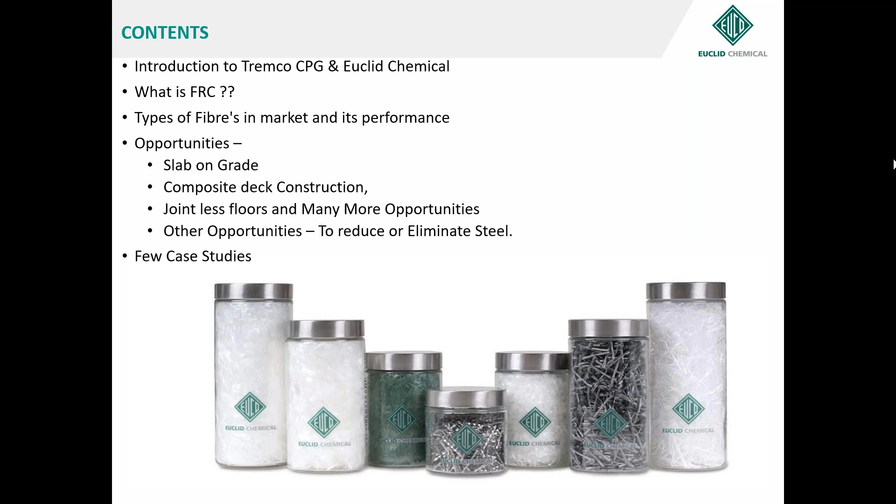So as an introduction, with the permission of ICI and QCrete, I've taken this so that at least people know where we are speaking from, and it's not that none of us know this company.

So we all belong to a company called RPM, Republic Powdered Metals. It's a 6.71 billion dollar organization based in Cleveland in the US, that's around 53.6 thousand crores globally, and it's listed on the New York Stock Exchange. We've acquired around 175 to 180 companies in the last 35 years when it comes to technology.

Under RPM, we have four groups. The group we belong to is Construction Product Groups. If you look at the technologies we have, one of the leading brands globally is under our umbrella, whether it is admixtures, waterproofing, fiber, fire protection, or color concrete, you name it, we're probably one of the companies which has everything under one umbrella.

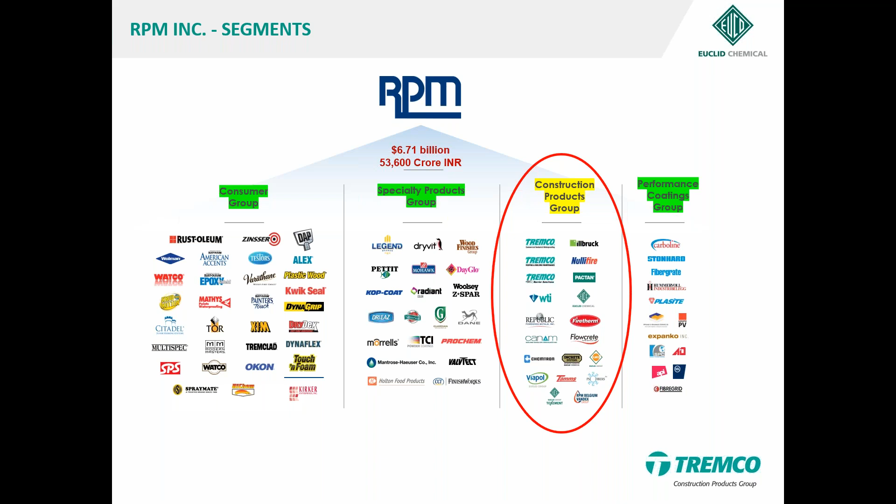In the near future, I think you will see the technology getting released in India also. So in India, the advantages we can all take are under the brand of Tremco, Vandex for the entire waterproofing range, then glazing, especially sealants, tapes, and EPDM rubbers. For flooring, all of you know the brand is Flowcrete, and you name the flooring solution you want, from fibers, densification, polish, epoxy, to terrazzo.

Will be available. Euclid is a 110-year-old brand globally, and for anything to do with fibers, admixtures, repair mortars, we would be able to serve through this particular brand. Willseal is another organization which will be getting into India, maybe in next around a year or two, which is into preform joints of flooring and multi-level car parking and buildings.

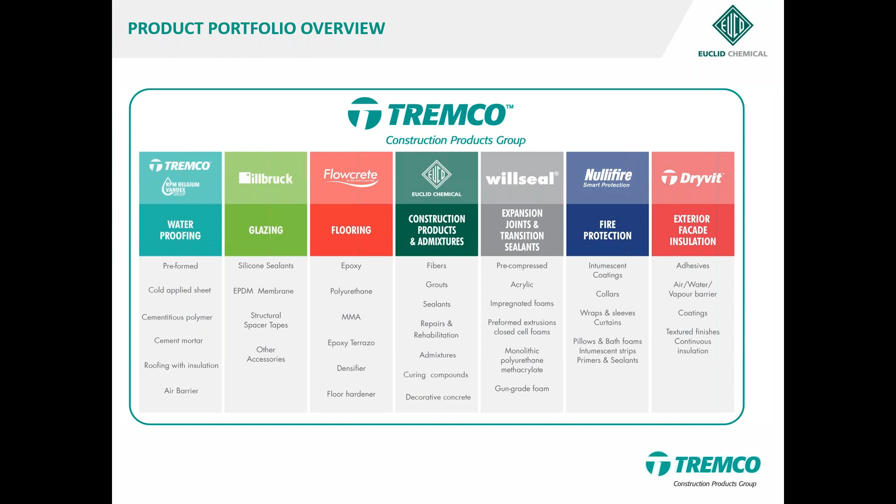Another one which probably none of the construction chemical companies have here is the Nullifire, the fire protection system for composite steel deck, which is basically into cellulose fires. And Dryvit is something coming up in the next few years, which India is going to catch up on - external insulation and facade systems. This is a small brief introduction of the organization.

So coming to the main topic, what we are talking about is only fibers. This is not something new to us. Probably we are using this as a fiber in today's world, but all of us know when you look at 500, 400, 300 years back, when people used to go to their village, they used to see straws getting mixed in, whether it is in mud or even mixed with cow dung, that was mainly used to give post-crack strength to that particular part. So this is not something new today, but it was also used in a very primitive age, and that has gone to the next level of technologies with design and other things for execution.

So majorly what we would be speaking today is on structural macro fibers, which will give you additional tensile and flexural strength other than the crack reduction part to the concrete. By doing this, basically what happens to the concrete is the integrity and durability gets increased because there is less cracking happening. As all of you know, with one small crack in the concrete, the entire deterioration or corrosion or whatever happens in the concrete starts with that.

So the basic thing is to see, as civil engineers, all of us, can we give - I know it's really impossible to give - concrete without a small crack, but at least we can reduce it to 95 to 98%. Probably that itself is going to be a big achievement to us as a civil engineering fraternity.

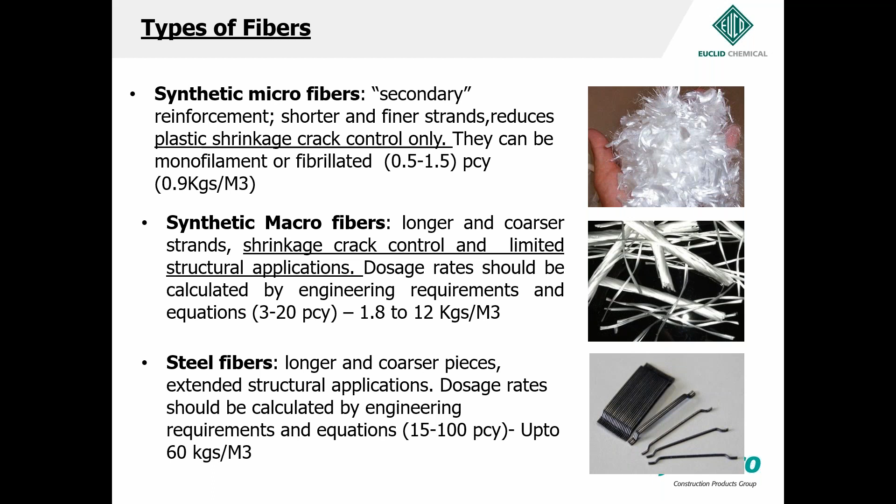Steel fibers, I think quite a lot of people know about it. It's also a great product to have. But yes, all three fibers come with their own advantages and disadvantages. Looking at the risk analysis, we should choose the right one for the right application, and the execution should be flawless. Only then you get the right product.

As I said, just because we are from a US organization, I just want to tell you very clearly - in the US market, the use of fibers is far ahead as compared to any part of the world. They use fibers literally because of the freezing and thawing that happens in US due to extreme temperatures. So from that particular thing, the fiber market in the US is very big. So when it comes to there, you can see the types of fibers we have. Even in microfibers, we have nylon-based, monofilament, fibrillated. Then there is a blend of macrofibers with microfibers - they do the designing of concrete with a lot of blends of fibers also for achieving different properties in concrete.

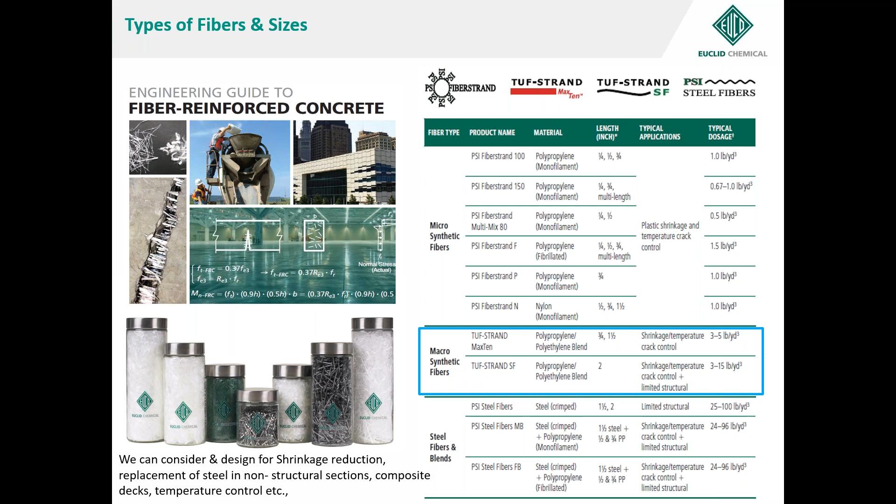So this is again an engineering part. It's not that you take a packet of fiber, add it, and get the output. You have to test it, design it, and then execute it at the site level. To introduce, fibers can be 10mm, 20mm, 38mm, 45mm, or 51mm - these are the different sizes available in today's market.

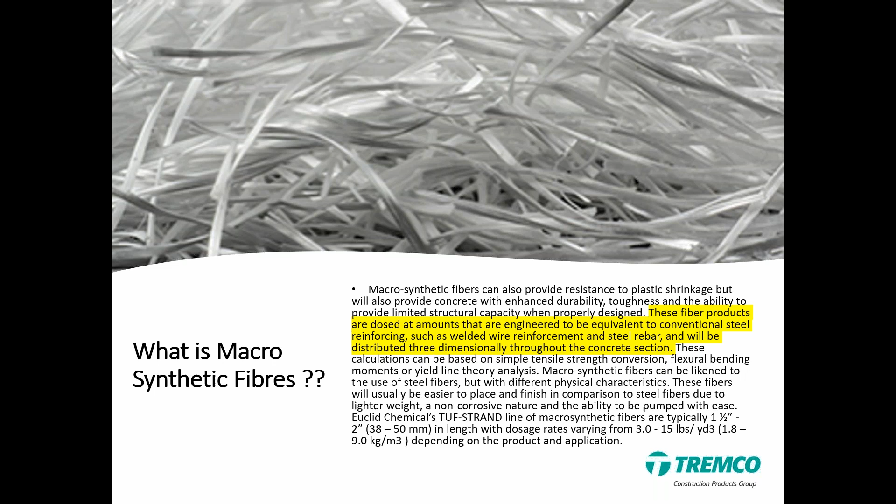So what is macrofiber? This is one of the topics we'll be focusing heavily on. It not only reduces plastic shrinkage cracks, but the most important thing is, for conventional steel, if you design it properly, we'll be able to reduce the rebar and wire reinforcement coming up in non-structural elements - that's the use of macrofiber. Please understand, there is a difference between microfiber and macrofiber. In microfibers, we cannot speak about replacement of steel bar or wire mesh at all in any civil engineering aspect.

In this case we have an RCC slab, and again we have 75mm of concrete. So for 75mm of screed concrete, when you do structural screed concrete, we again add reinforcement. A lot of places you can eliminate the steel usage entirely - you can avoid cracking and eliminate steel.

So these are the advantages. I spoke to one of the top consultants in Bangalore, and they told me the non-structural element concrete in a condominium project or any project is almost to the tune of around 27 to 28% of the project. So even if you reduce 27 to 28% of the project without using steel, that's a big saving to the country, and probably you'll also make the concrete much more durable.

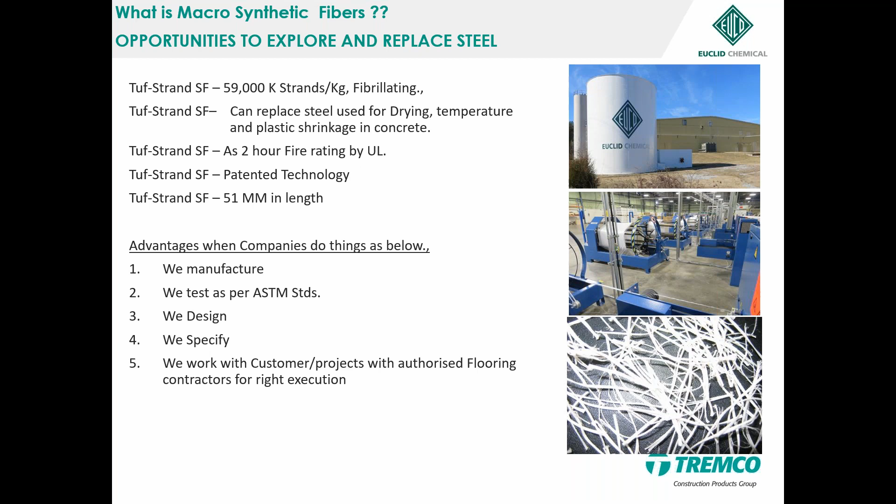Second thing is you need to have a fire rating in some of the elements. And it should be 51 mm in length; anywhere between 42 to 51, 52 can be called macrofibers. So this is what is very important to us.

Then what is it all about when it comes to properties? Whether it is dosage, it can vary between 1.8 to 12 kg by design. So again and again, I want to reiterate, nothing what we're talking is without design. We do not recommend any dosages unless you're adding for a simple plastic shrinkage crack. So load, we'll always take the information from you and provide this. So when it is aspect ratio, tensile strength, modulus of elasticity, all of these things are available to you.

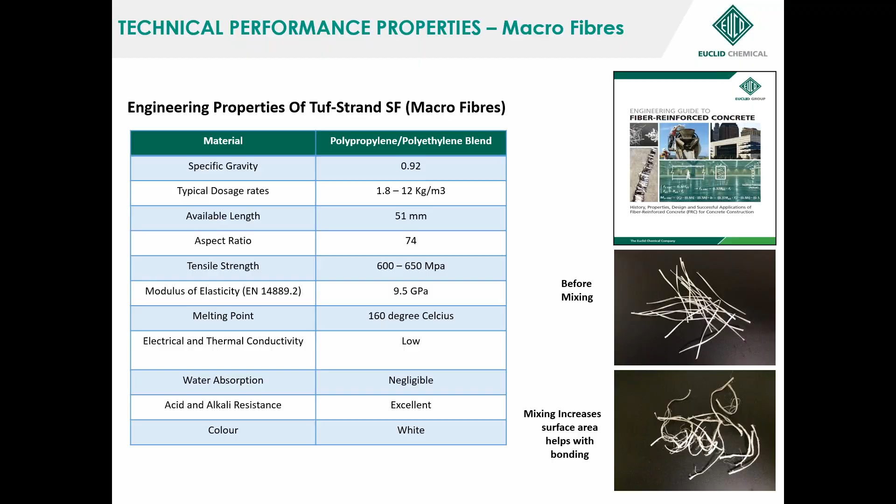So this should have this type of properties if you really have to pass the ASTM standards. So this is a lab. Without this equipment, you cannot get into fiber FRC at all.

So this is an Instron machine which does the testing on beams, whether it is C1550, all of this flexural strength, tensile, testing of filaments is very important. So it is very important to have this equipment. Otherwise, we are just adding fibers like any other fiber, like the microfibers at 900 grams per cubic meter.

So these are the testings you need to do: ASTM C1609, C1399, and especially rheology properties are done with 14651. So these are the tests you will have to go through for each and every design when we do any mega projects, whether it is for a slab on grade, whether it is for steel deck, all of this.

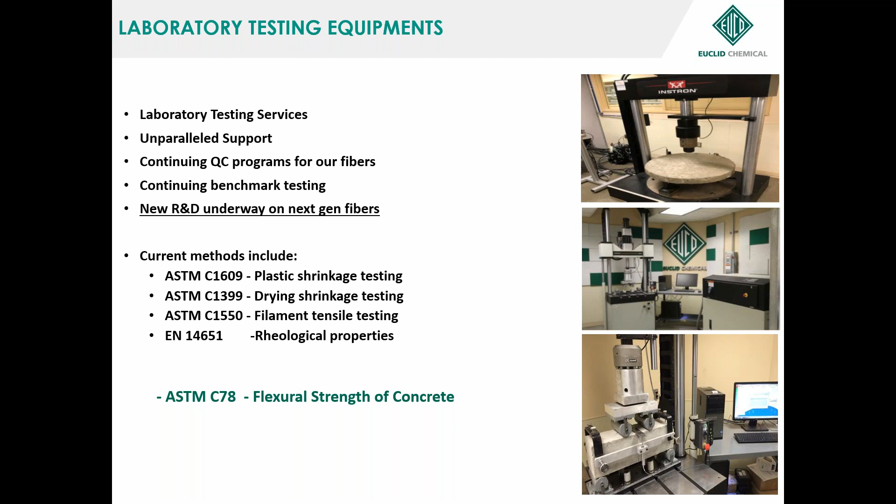So I'll just take you through slab on grade, where we can replace the steel entirely by doing the right design, depending upon the pile, K value, and all other parts of it. This is a major thing in India today. If you're able to do slab on grade and replace the entire steel for this, it's a big savings. And I'll show you some case studies where there was a massive savings to the customer worth few crores, not only by rupees, also by the time.

So what we are doing is, conventionally with proper designing, we are moving towards this jointless floor or extended joint spacing from a conventional 3x3 or 2x2, which is what our standards or whatever we are practicing today. We move those joints to the major thing. We almost go up to around 15 meters by 15 meters.

One of our very close associates working with us moved with fibers and Conex put together, which is a shrinkage compensating admixture put together, and can move towards around 12 to 13 meters per panel, which is a big achievement from 2 meters by 2 meters to 12 to 13 meters by 13 meters. It is a big leap they have taken, and I think that is getting monitored. It's already been a few years now. It is under a lot of monitoring in one of the projects in the north of India.

So what we talk about on this extended joint spacing, we need to have high flexural strength fiber reinforcement. There is no compromising on curing and other things. So a lot of people say that we add fibers, do we really have to cure? Some questions keep coming up like this. I'm adding shrinkage reducing agent, shrinkage compensating agent, should I want to do curing to the concrete? Some basics cannot be reduced. Please understand, these are really basics where some of the products also need water for better performance.

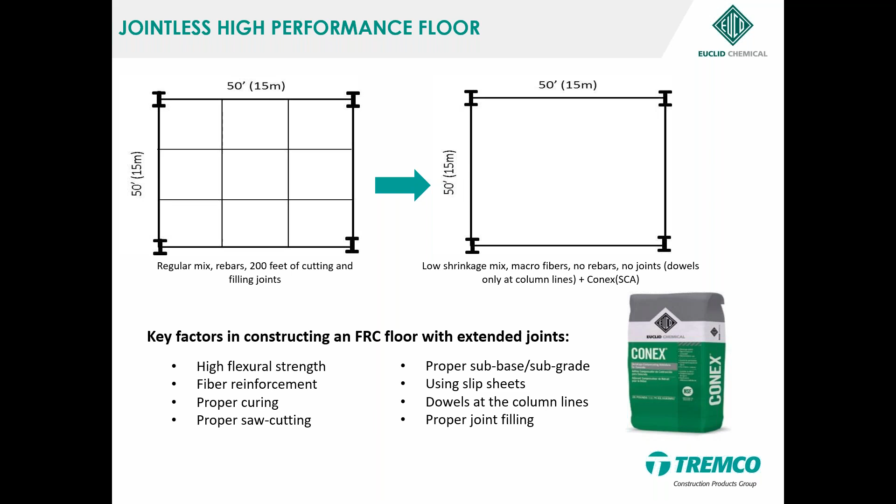So what are the advantages?

What you see when we are moving from reinforcement concrete to fiber reinforced concrete without steel? You're talking about reducing labor, cost, speed, safety. A lot of people's legs get torn apart. You're improving the process because imagine you're doing a 50,000 square meter job. Imagine tying of reinforcement, getting the reinforcement and placing it itself is a big process. So you're eliminating that in one shot. Once your consolidation of soil is over and you're done with your LDPE sheet, you simply start with high flow concrete or self-compacting concrete, whatever is the best possible thing. We'll be able to do it with macrofibers instead of reinforcement, and you finish the concrete. So there's a lot of savings.

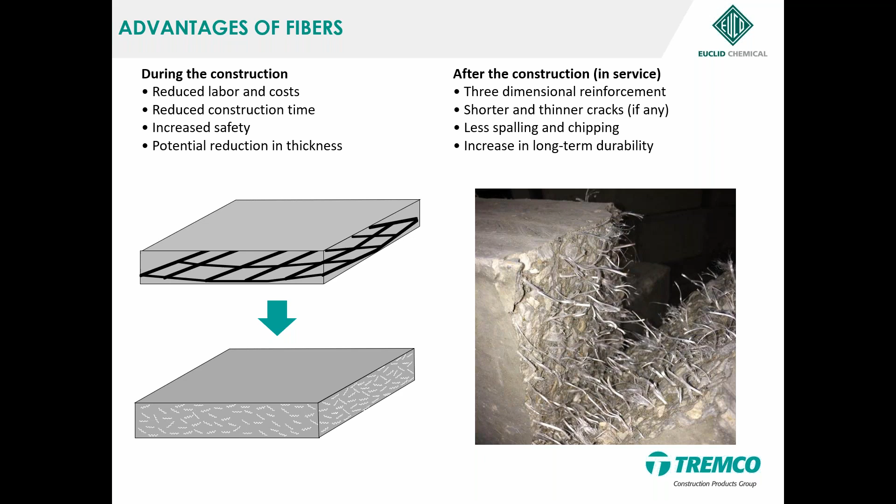See, on the left side, you see the way it has traditionally been used, people trying to lift the reinforcement for the concrete to move. Basically what happens, we generally have cover, but the cover is for the sake of telling that there is a cover. By the time you put the cover and the concrete comes inside, a lot of people stamp on it, a lot of trucks move on it. So the reinforcement is there for the sake of reinforcement. It is at the bottom, it is really not there at 50 to 60% above the concrete. Because of that, you can see the middle thing, which is the cut concrete, is there. The reinforcement is at the bottom and the concrete there.

Because of this reinforcement and no fibers available in the concrete, the tendency of the concrete to crack is very, very high. So this is the reason we say that we need to have fibers into the concrete, to reduce or to increase the ability of the concrete to resist cracking. So this is something we should look forward to in a futuristic way.

Understanding of failure mechanism, a lot of people know about it. People like Mr. Mohan Ramanathan are also there in the show. They are the masters in these particular executions. I've seen their design, so they really understand what is curling, load transfer, joint spacing. All of this we should understand, how to mitigate this by having the right mix designs, right subgrade preparation, designing done earlier. At least 3 months before the project starts, we should have everything in place. So everything boils down to proper planning. You cannot start an excavation and then tell that, oh, please come with fiber reinforced concrete. That's not the way to do it.

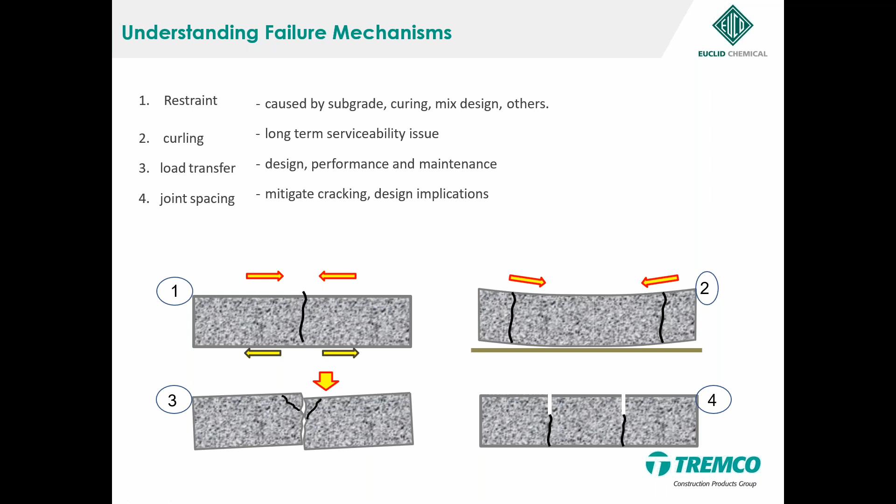So load transfers are very important. You can look at the third photo - it can have differential settlement, or the soil can be loosely compacted. So it has various things. All these things can be taken care of if you're really looking at fiber reinforced concrete.

As I said, you can see the fibers spread across the concrete, whether it is bottom or top or anywhere. So whether it is crack control or shrinkage control, because it's got a 3D reinforcement, it is controlling that. So you have this reduced on this particular part. Even at the edges, if you see a crack coming up on the construction joint or expansion joint, with fiber reinforced concrete, at least it holds it back for a longer time because of the post-crack resistance that fiber concrete brings into the structure.

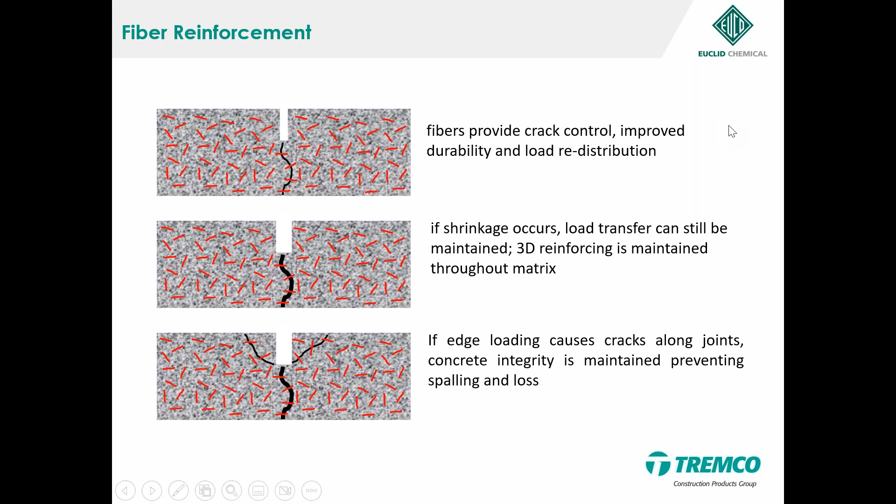As I said, none of these things are done by just adding a packet of fibers. These are all done with a lot of calculations. And as I said, from our side, Mr. Srinivasan is available. If anybody wants some support, please connect with Mr. Kaushik for this, and probably we'll see how we can work with QCrete and come back to you on that.

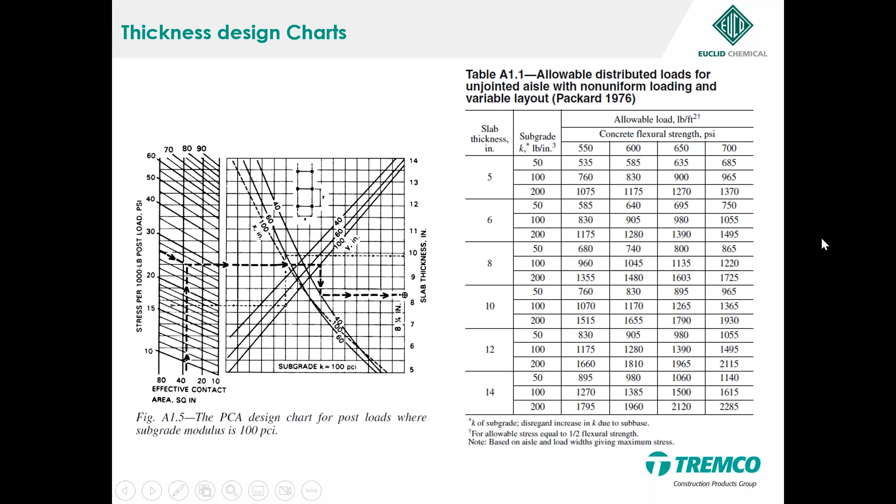So whether it is the design aspects, whether it is which slab thickness you want to choose with a subgrade, with a K value, and flexural strength requirement - all of this is taken into consideration while designing the fibers, dosage per cubic meter, and then the report will be given to whoever is interested, whether it's a developer of the warehouse, wherever the industry, or to the RMC ready mix concrete people, or whoever it is. As I said, it all goes with the calculation.

So we are talking about how do we convert steel reinforcement calculation into the fiber reinforcement calculation. So whether it is a single mat calculation, it can be done. Whether it is a double mat calculation, it can be converted to a fiber reinforcement calculation. So this is what we apply, going from conventional steel reinforced designs to the fiber reinforcement design.

If you can give the information about this today, we can definitely convert it into fiber, and it'll match all the properties of steel, or sometimes it is better than that. Most of the time it is better than that. So that's the reason we are talking about high performance fiber reinforced concrete.

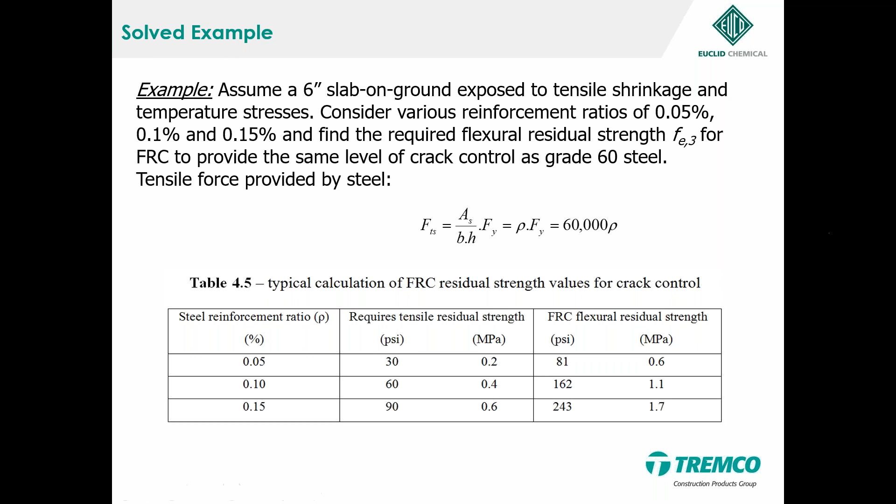To the calculations, it is definitely much better when it comes to the calculations. So we should look at designing in this particular aspect. As I said, this is a theoretical, a designed output, what you people will get.

I've just given a typical example, this one, my colleague Srinivas helped me in this, putting these things together - how we can do design 1, design 2, design 3 in a different way for the same mix design and the same subgrade modulus of elasticity, this modulus, and then different slab thicknesses, how the load value of different loads and the dosage of fiber differs, shown by this table.

Because of so many designs we have done over the past 4-5 years, we thought we'd put it together for everybody to understand that for different slab thicknesses, we can reduce the thickness when the reinforcement of the fiber goes up. But if you want that to happen, we can definitely do it. It is possible. We should look at the cost engineering aspect also.

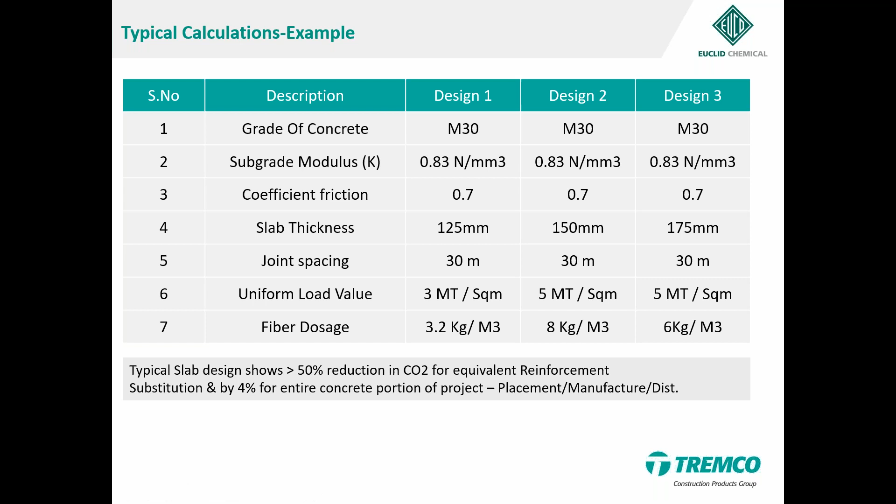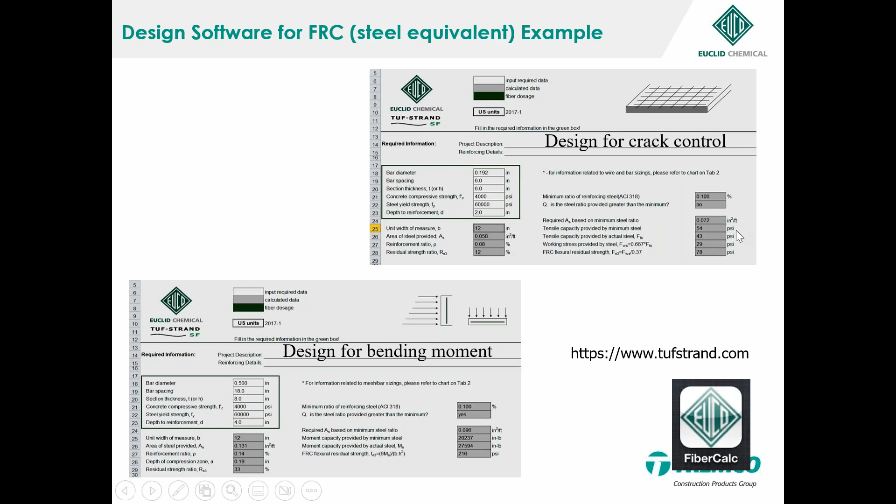As I said, all bending, whether it's crack control, bending moment, flexural, all these designs will be provided to you people, you can take it up. So that is a short summary, and I will just take you through a small project we did, just to show that whatever I've spoken is also executed in a particular job.

This is one of the jobs very close to Coimbatore. People know it as Erode. This particular company makes the blade for a turbine, and they also make high-speed shaft generators. So this is what they do in this particular factory.

So we were involved in the process. We did the load testing. Sub-base CBR values were taken. Dead loads and live loads were calculated. LDPE sheets were put in place. So all the designing was done accordingly.

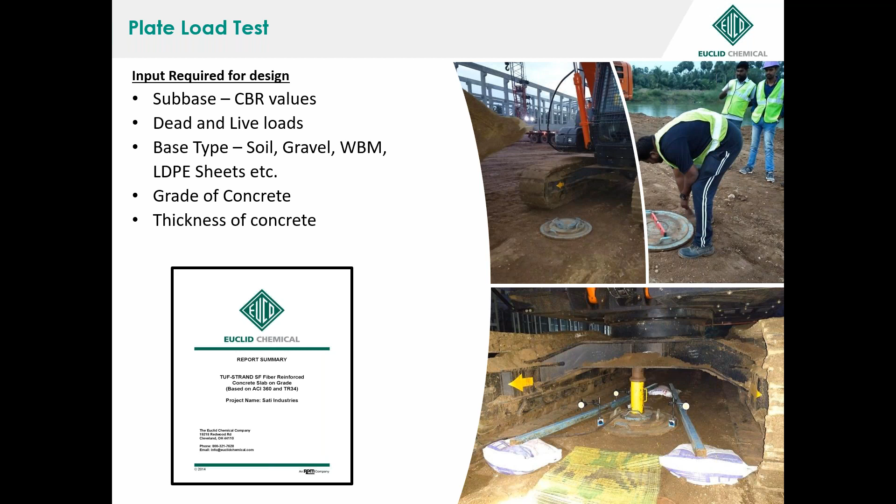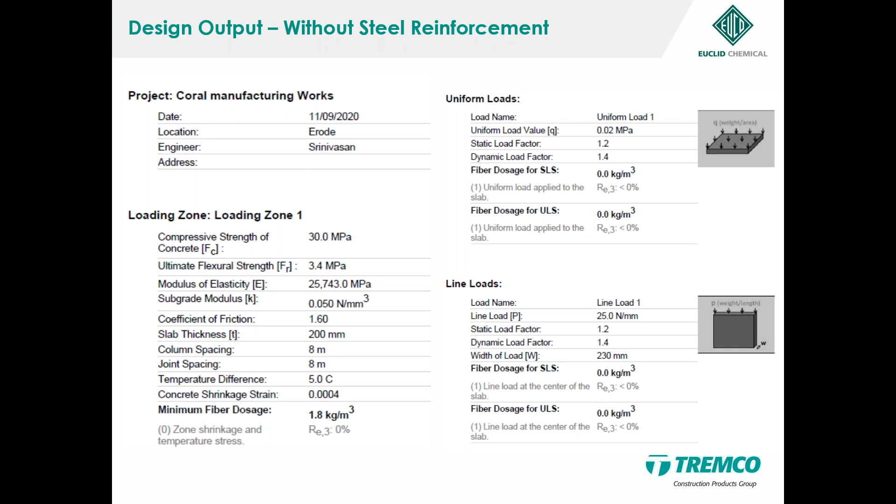So this was the output of it. Whether it is rack post, this was taken. The rack loading was taken into the calculation. Line loading was taken into the picture. So all these things were provided to the client. What I mean is, I'm just showing you the process we go through while designing without steel.

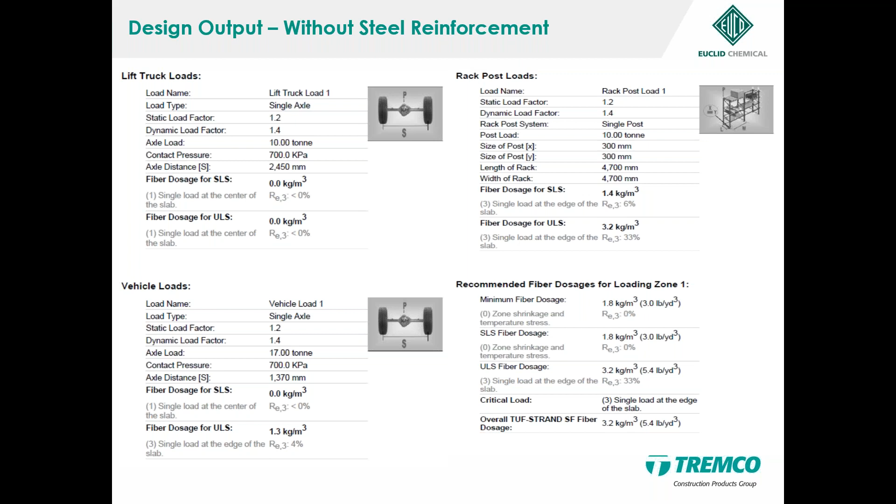So this is an execution. You can look at this. I think a lot of people have mastered it, I'm sure, but there's still a long way to go to take it to the next level.

But you can look at it - with conventional steel reinforcement, probably with tying and everything put together you may do 200 square meters, but on this particular job the person was able to do almost around 1,000 square meters per day. Because they were able to achieve the timeline, the client was really happy because of the speed. I think the entire job was done in around 35 to 45 days.

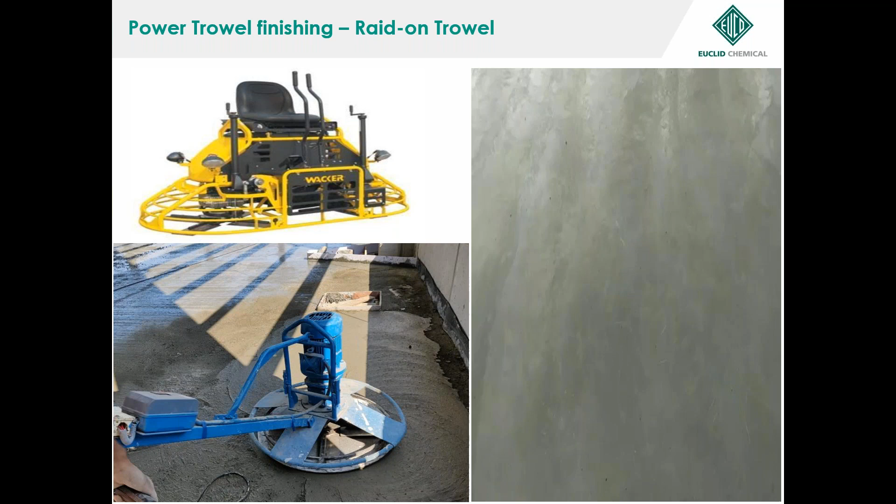The entire job of around 35,000 square meters - you can look at the finish. You don't even see that there is a difference in the finish when you do it rightly. So this was the finish we achieved. You can really be confident about the finishes if you use the right equipment at the right time. So this was the job, how it looks like.

And not only did we do the internal part of it, we also designed the road around that particular factory, but the dosages are different. That just gives you a glimpse that we don't only do the internal area of the slab, slab on ground calculations and execution - we can also take the axle load of the trucks and other things which comes to the maximum, put it into the calculations and a software calculation, and then execute it.

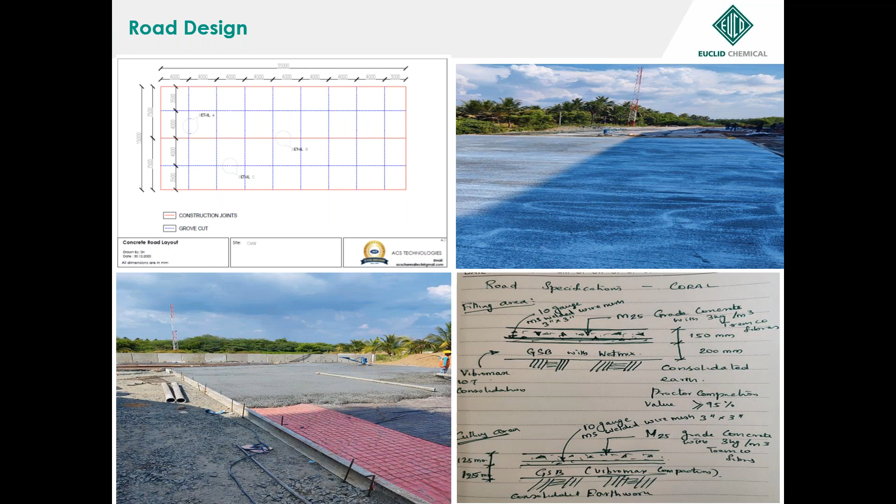Another job, one of many, I'm sharing some examples. This job we did was in IKEA, Bangalore. This was a slab, a screed of 75 mm, varying anywhere from 35 mm to around 75 mm to 95 mm.

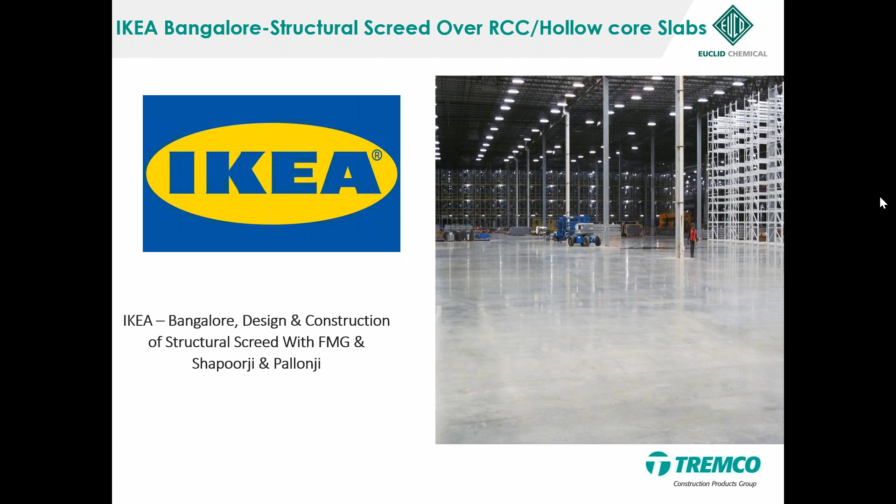This was done on a hollow core slab and RCC suspended slabs. This is where these applications are massive in our country. If you're able to reduce steel even in this area as a country, everybody will benefit. So again we approached with design and build, and it was done with Shapoorji Pallonji, and FMG was the other company who worked along with us to execute this particular job.

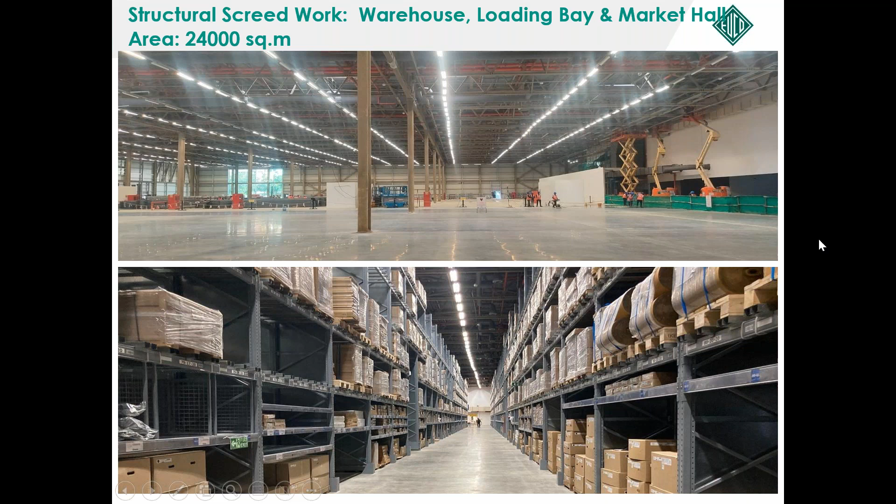So this is how the project looks like now. It is fully operational, it's become a gala event now. People go there not only for shopping, they spend a lot of time in the outskirts of Bangalore. You can look at the finish - after doing this densification and polish, you can see the way the concrete looks like now.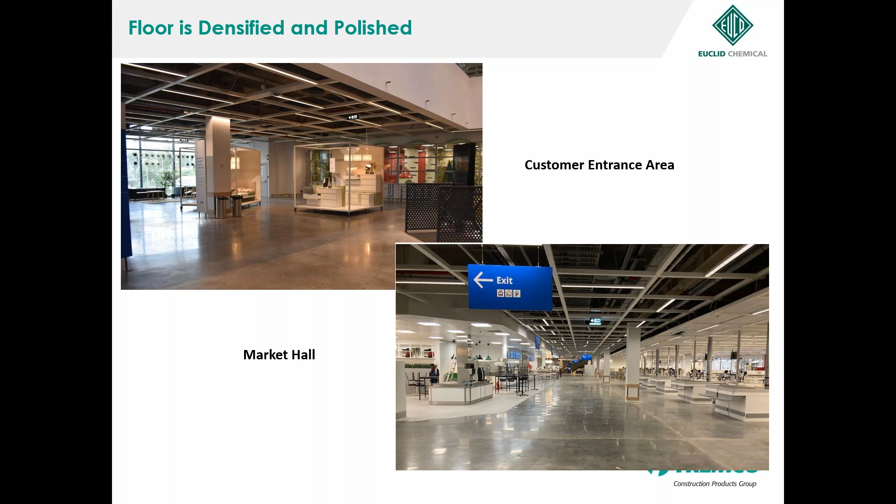A lot of people have doubts about adding fibers. The most important thing is to add the fibers to the dry aggregates as much as possible. We should not compromise on this, because the fibers - a lot of fibers are fibrillated or fibrillating, two different words. It is better that once it goes into the friction between the 10 mm, 20 mm aggregate and sand, the fibrillation happens, it opens up, and has a better anchoring into the concrete.

So it is better that we add these fibers in the dry state. Otherwise, if you add it when the truck comes to the project site, and suddenly add 12 kgs or 15 kgs per dosage, even with microfibers - say 1 kg into 6 cubic meters - if you do not do the rotation for 10 minutes, and do not take the slump to 175-200 before adding fibers, the slump drops to around 110. But if your slump is already 110 at site and you add fibers, it will come down to 25.

Then what people do is add water, and you still have a problem with cracks. So this is something to look at - best practices which should always be followed. We always say to use it in a dry state. If you cannot, please see that the slump is at 175 to 200, then add your fibers and see that it comes to around 125 to 150, depending on the type of concrete you're pouring. Otherwise it'll fall to 25-30 mm, causing balling of concrete, and people will blame the fibers for a big issue, when really execution is more important after designing is done.

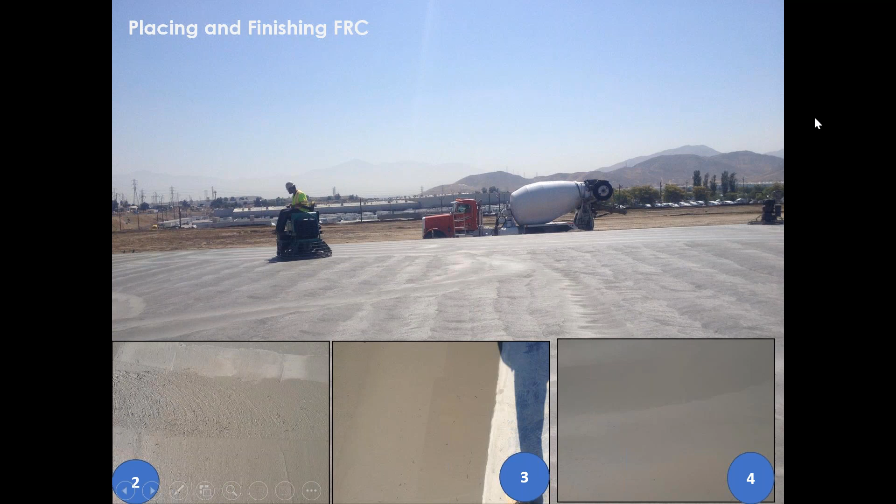Please understand that this is a special concrete. It is not conventional concrete at all. So it has to be planned. It has to be added the way we spoke about, with the right slump, no addition of water, and the execution of troweling guys coming at the right time and doing it is very, very key for success of any particular fiber reinforced concrete. So you can get as good as this concrete.

So why should you compromise if you do a little bit of good planning? From that slab on grade, I'll just take you through another opportunity where you can replace steel, on the composite deck construction. This is catching up in India in a very big way. And we need to understand why people are talking about steel composites.

Basically it's very, very fast. It is expensive, by what I know when we speak to companies like L&T or other big developers. Structural consultants say the cost is anywhere between around 25 to 30% higher as compared to RCC structures. But still people go for it because of completion of time. So you earn money, or rent, for the big IT parks coming in, much faster as compared to the RCC part.

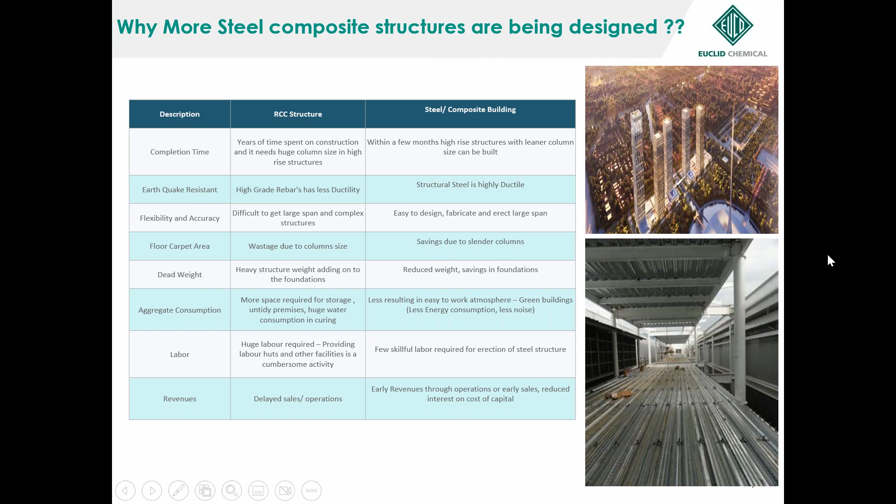It is better earthquake resistant, more flexible, and gives more carpet area because everything is slender and thin. Dead weights are very, very less. So the use of skilled manpower is also reduced, because otherwise it takes huge skilled manpower coming into the place. Where in India, with freebies given by each government, you will not be able to get the right skilled labor doing the right execution of the job.

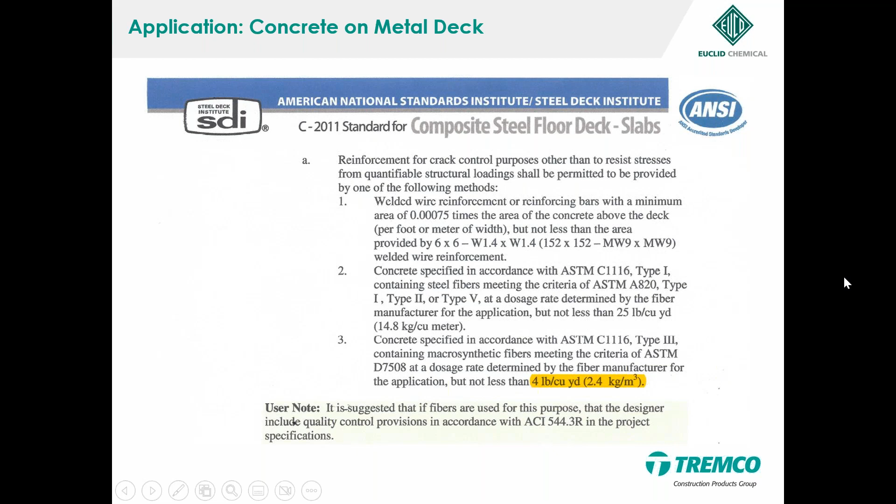So again, we are not talking about anything outside the code, whether slab on grade or deck. We are talking clearly about the ASTM method, SDI, that is Steel Deck Institute, where it is clearly mentioned you can use steel mesh, steel fibers, or macro fibers at a particular dosage already defined. It's close to 1:5, that every kg of polypropylene macro fibers added, you need to add almost 4.5 to 5 times of steel fibers. So you need to add so much material into the concrete.

So what we are talking about is basically the reinforcement on the deck is replaced with macro synthetic fibers. Even in the negative bending moment, we can increase the dosage of macro fibers, or look at a 4 feet reinforcement going across the beam, which can take care of the negative bending moment. Either way you can think about it, and there are job references, jobs executed with and without this. I think you can contact Mr. Kaushika. He would get back to you to take care of these particular design aspects also.

So what are we talking about? The main purpose of adding reinforcement on top of the deck is basically for 3 reasons: plastic shrinkage control, temperature control, and drying shrinkage. In some places people design a little on the cantilever side. When the deck goes outside by a few mm, or half a meter, or 1 meter, there is a cantilever movement coming in. There you will not be able to use fibers only. You will have to go with a blend of your regular reinforcement and this together.

But the most important thing you are looking at is that this particular fiber has to be qualified, UL tested with 2 hour fire rating, because any composite deck building has to have 2 hour rating for the entire building. So obviously fiber is one part of it which you have to take care of. So you look at the advantages here when I'm talking about not just speed to the construction.

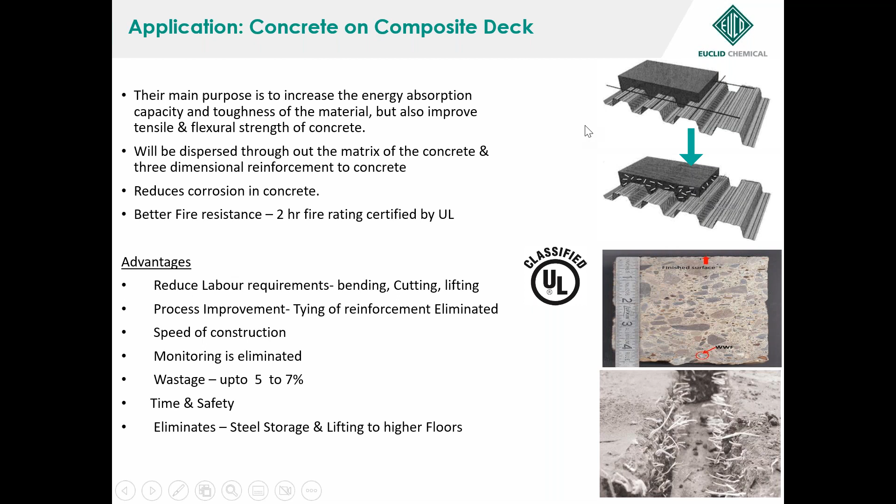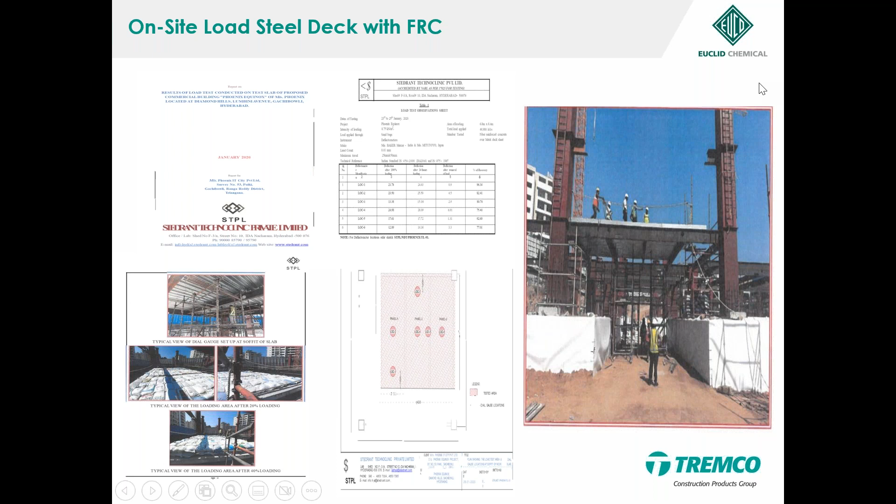A lot of people are still thinking, okay, how does it really replace steel? So projects have been executed with testing done only with reinforcement removed. As per IS 875, a gauge was fixed to monitor the bending moment and the recovery of the part at different slots. As per IS 875, the recovery should be more than 75% at the location tested. It was then implemented in a bigger project where a load of almost 50 tons was loaded onto this particular slab for testing before implementation.

Again, as I said, with the addition of fibers, self-compacting concrete flow - there is no compromise on this. Curing cannot be compromised. A lot of people ask, 'since I'm adding fibers, should I still do curing to avoid shrinkage?' Please do not compromise on that.

Here we also see one of the engineers adding the fibers into the dry mix directly into the bin because they did not have a fiber dispenser.

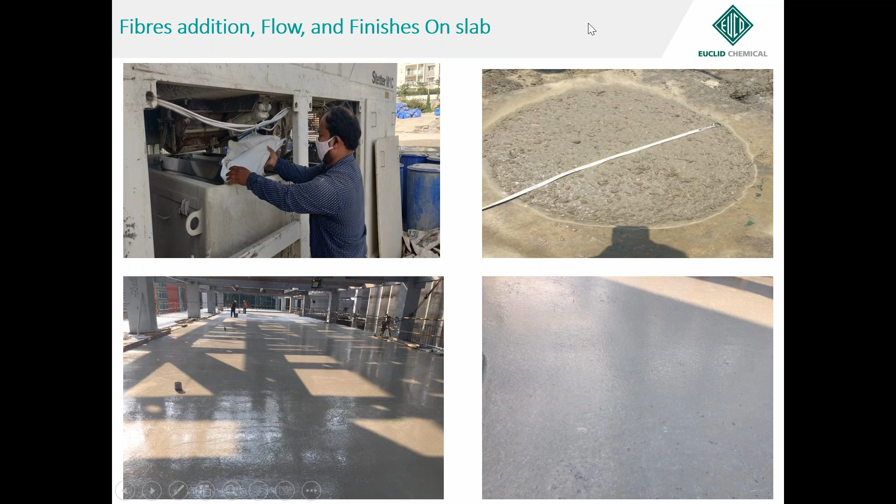So these are the processes, these are the beams. People wanted to understand the way fibers are calculated per cubic meter. It was weighed, cleaned, washed, weighed again, and verified to fall within 10%. This was an M30 SCC mix, FRC.

So whatever I spoke about, you can look at the fibers which are distributed from literally the bottom of the concrete to the edge, from top to bottom. So the proper spread of concrete can give you a great high performance fiber reinforced self-compacting concrete.

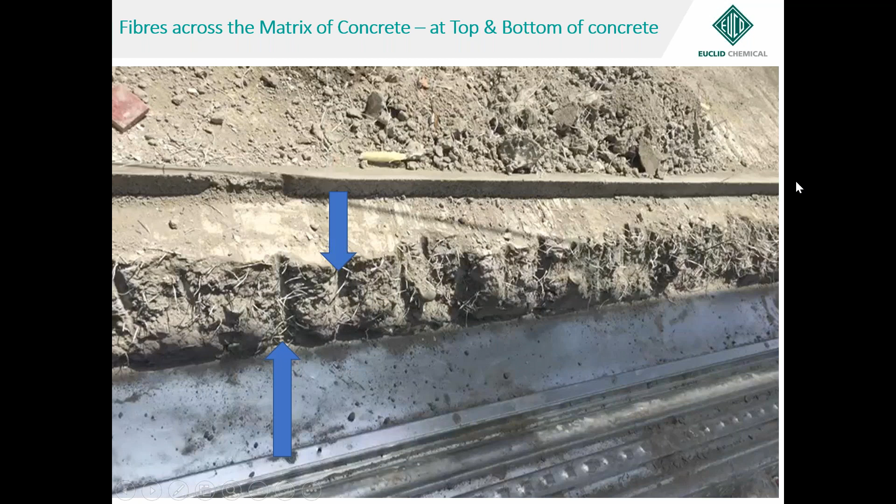So I just want to show you a small video of how the testing and laboratory process has to be done - just to get a glimpse of this.

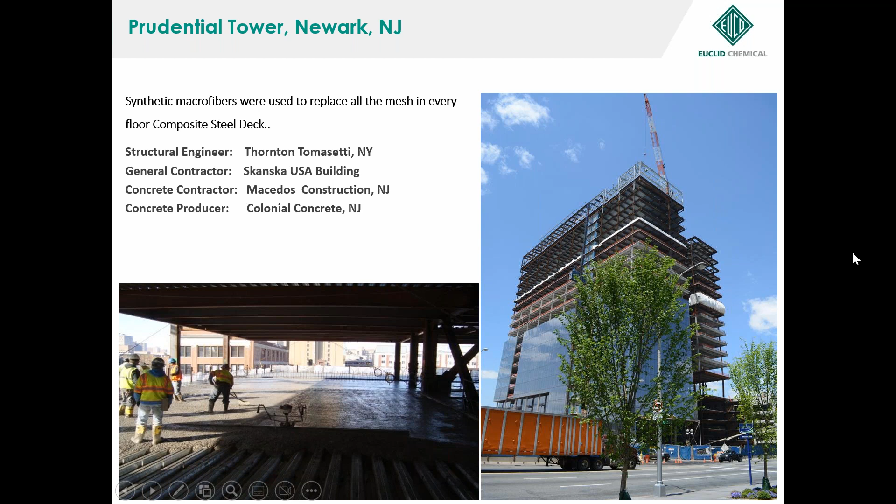This was just a demonstration about how the testing and other things have been done, and this is one of the big towers in Newark, where it was done by Thornton Tomasetti on a composite deck where we replaced the entire reinforcement.

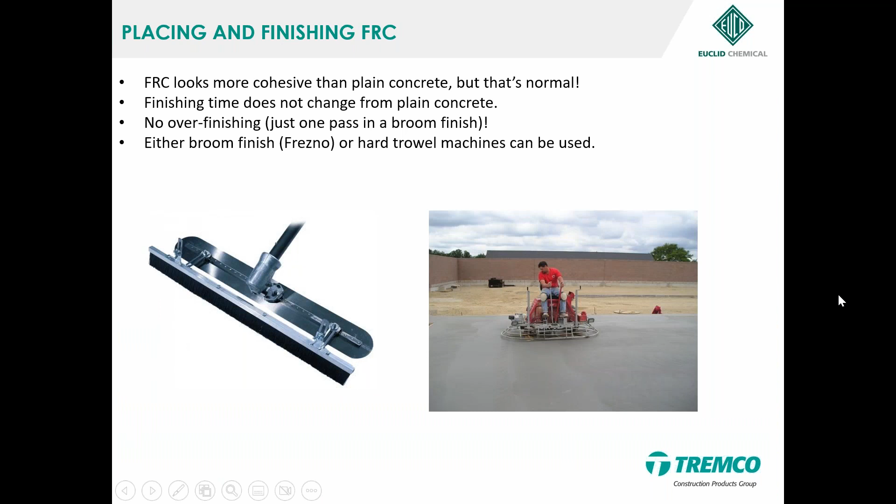Placing and finishing - I think we already spoke about this, it's the same method. But other than these two data points, I just wanted to share the different applications. What opens up for us, at least in these jobs, is that we can really work on eliminating the reinforcement.

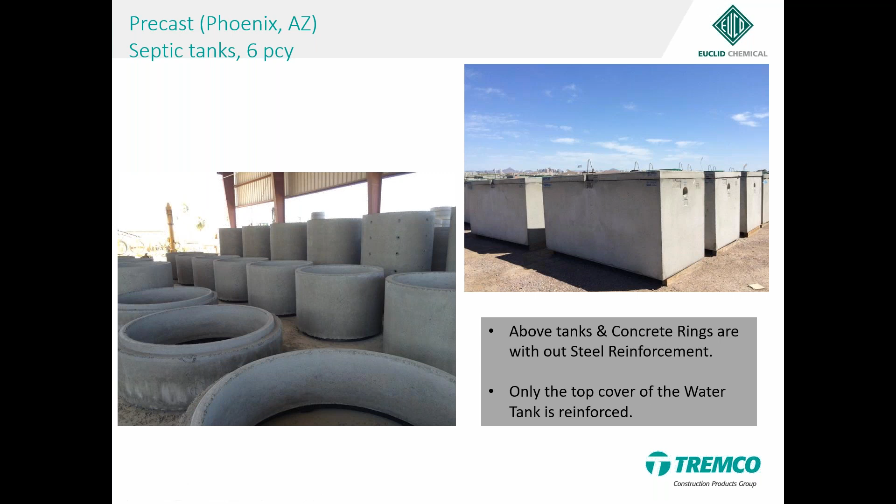This is for precast applications - precast septic tanks, water tanks. The non-structural elements can always be done with this easily. Steel fibers and macrofibers have been used in precast elements here, replacing the entire steel.

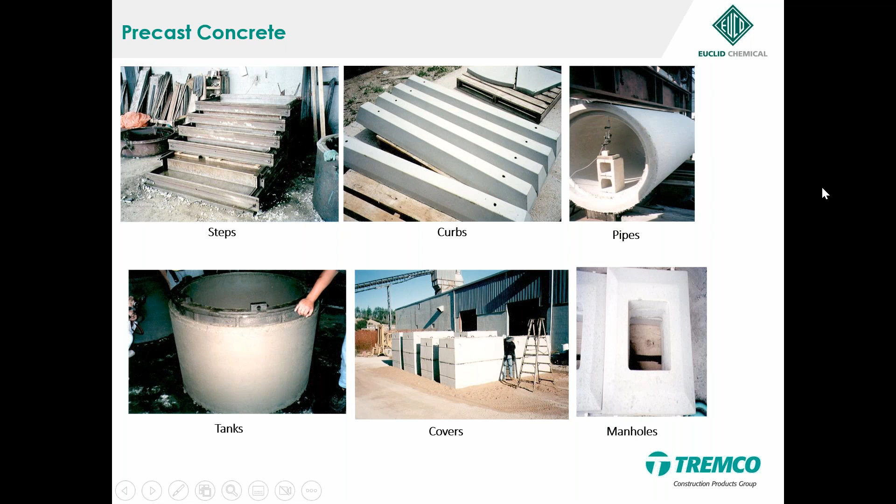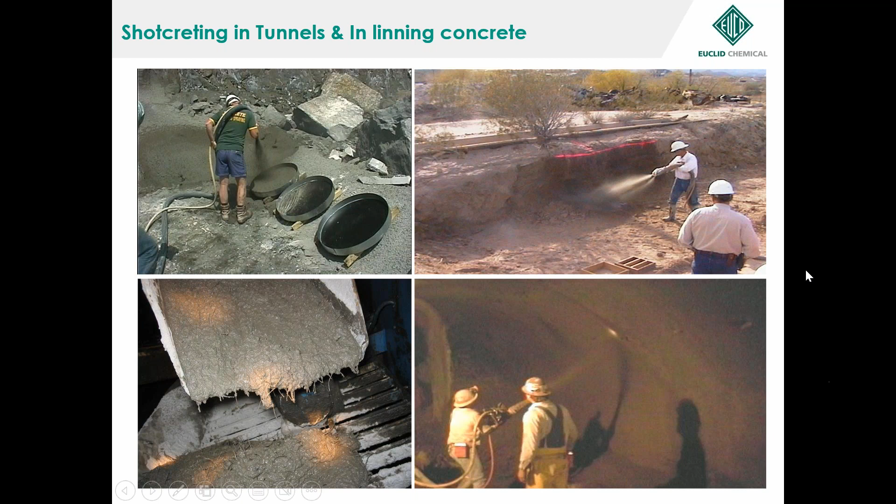But there's a lot of data going on - railway panels, spun pipes, drain manholes, all these things can be done with macrofibers. So underground, whether you're talking about shotcreting or lining concrete, you can look at the welded mesh being replaced, or if you're going for a single shell lining directly, that can also be done with this. Then other new codes are coming in as well.

You have to understand this is passive fire protection. These microfibers have been used in transport tunnels to handle situations where there is fire and smoke. This particular fiber burns at around 165 degrees, and as micropores are created in the concrete, it allows the smoke to escape so that people do not inhale it and die. That's one reason you see hot gases get eliminated and escape. This is what's happening in some of the specifications coming out recently.

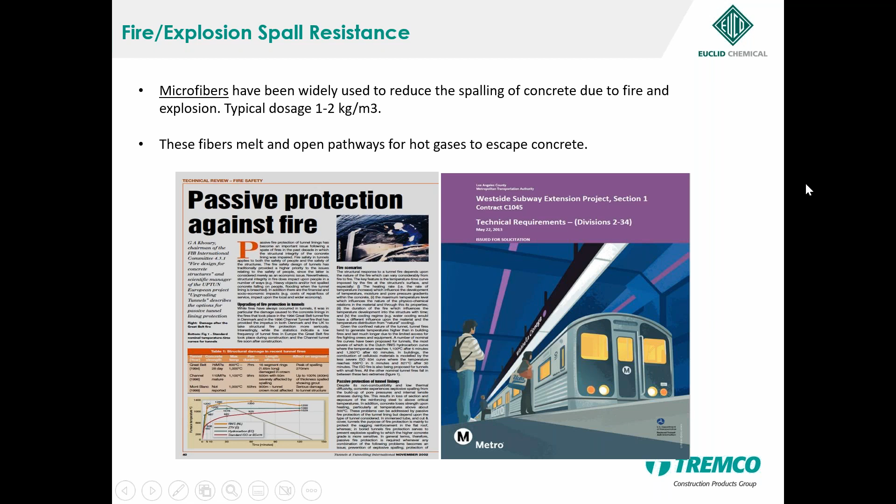Lightweight concrete - a lot of people call us asking about 2 kg, 2 MPa lightweight concrete poured on the slab, whether it's a terrace slab for insulation, sunken slabs, or any other slab, but it's very brittle and starts crumbling. Because the 2 MPa isn't really 2 MPa - when the concrete moves from the batching plant at 0 minutes, after 2-3 hours curing, the density increases because air bubbles start reducing and escaping. So if you're designing for 5 MPa, you may only get 2 MPa, and because of that you get a crushing or crumbling effect. But if you use macrofibers, it gives you the physical properties even at low strength concrete - improving flexural, tensile, or impact properties to a reasonable level compared to control concrete. So you can think of this as another application to take lightweight concrete to the next level, for bricks, concrete blocks, or pumped concrete.

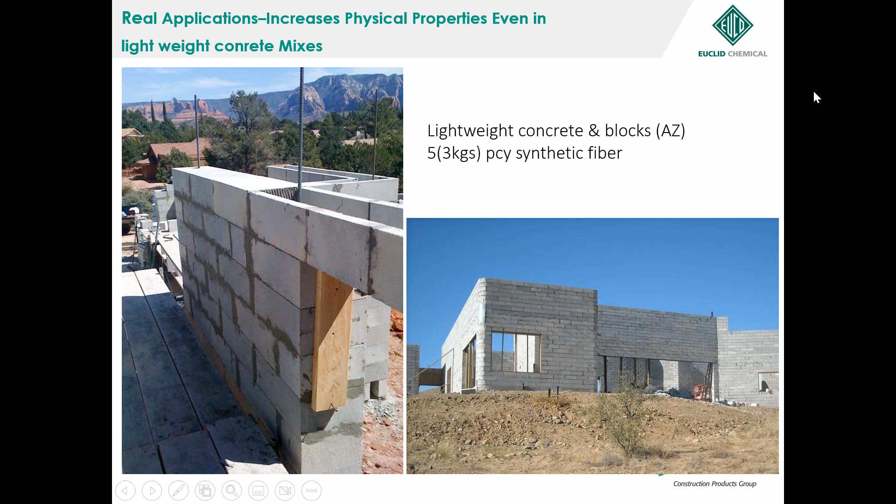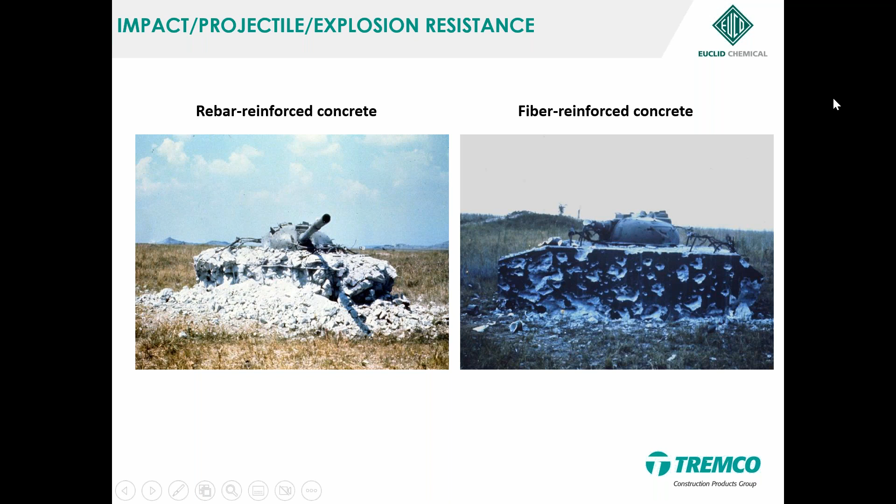So for walls, you can look at this one for explosion resistance. This is a classic example of one of the canals where double mat reinforcement was reduced to single mat reinforcement by using macrofibers. We also do this type of design for slab-on-grade applications - wherever you don't want to go for double mat, you can go for single mat instead. Imagine a canal running into a few hundred kilometers, and you remove one layer of reinforcement - imagine the savings for the entire project. It will run into crores.

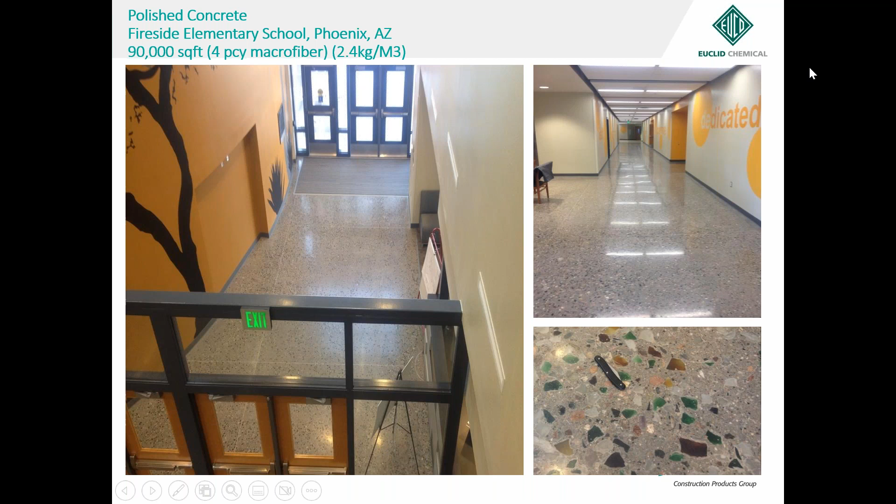This is a classic case where you want to design polished concrete, or what we call exposed polished concrete. You cannot afford to have micro cracks or anything coming inside. This is where fibers help you have concrete without cracks, so you can expose your colored or polished concrete directly.

So that's microfibers - let me just touch on microfibers. As I said earlier, macrofiber is 51 mm, microfiber is 10 mm, and it's only used at 900 grams per cubic meter, just for taking care of the plastic shrinkage of the concrete. Please do not use this fiber for any structural replacement, at any cost. This is definitely something with great advantage against plastic shrinkage, so this is something you can use it for.

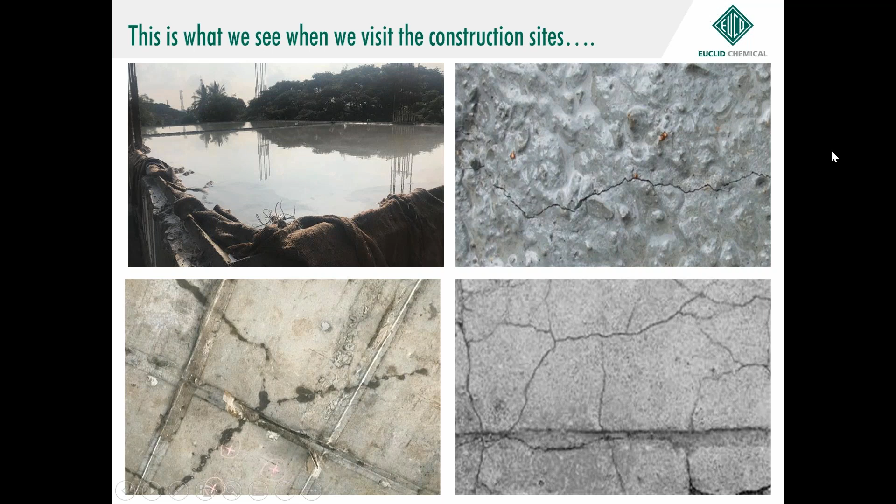Because generally what happens when you go to a construction site, we see this very, very often, and this is something you can take care of by using microfibers. The most important thing for all of us to learn in civil engineering is that the more the water, the worse the drying shrinkage - as shown on the left side. So the more water you have, the harder the drying shrinkage is going to hit you. You have to keep it at a nominal level to have a durable concrete, consistent across each water-cement ratio.

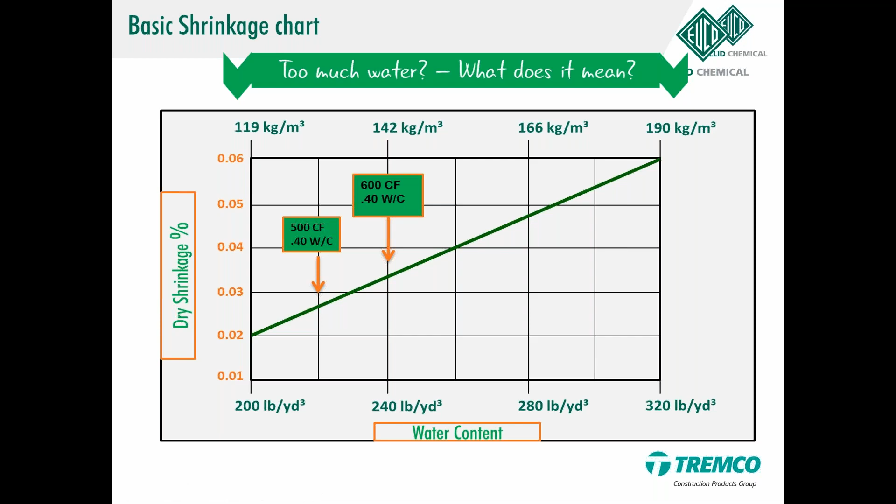So these are some things which we should keep in mind when we are designing concrete, or planning concrete, or putting things together for high performance concrete.

These are typical things which microfibers will be able to eliminate. All of us know why plastic shrinkage happens - the water, when you put the concrete in, moves into the atmosphere, and voids are created. In those voids, surface tension comes in when water is sucked out from the concrete, creating a weak pore, and then you start seeing cracks in this pattern.

So I just want to summarize this part. What we can do is differentiate between structural and non-structural elements of concrete volumes in each project, design it as per best practice, take advantage of speed of construction - because it's all about money, you're saving money. Take advantage of not only shrinkage reduction but improving the physical properties of concrete with fiber reinforced concrete, FRC, and get the benefit of both speed and eliminating corrosion.

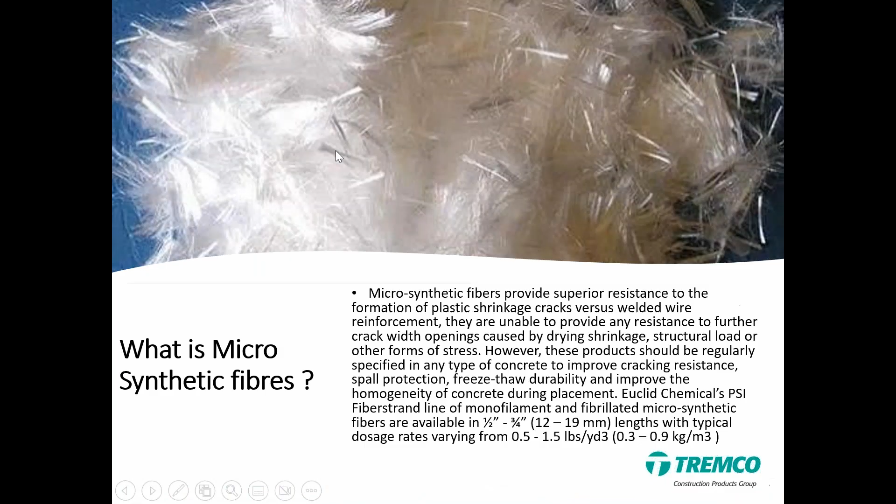Thank you, sir. The next question is, at which places do we need to use fiber reinforced concrete? Can I go back to the slide? This was a starting point.

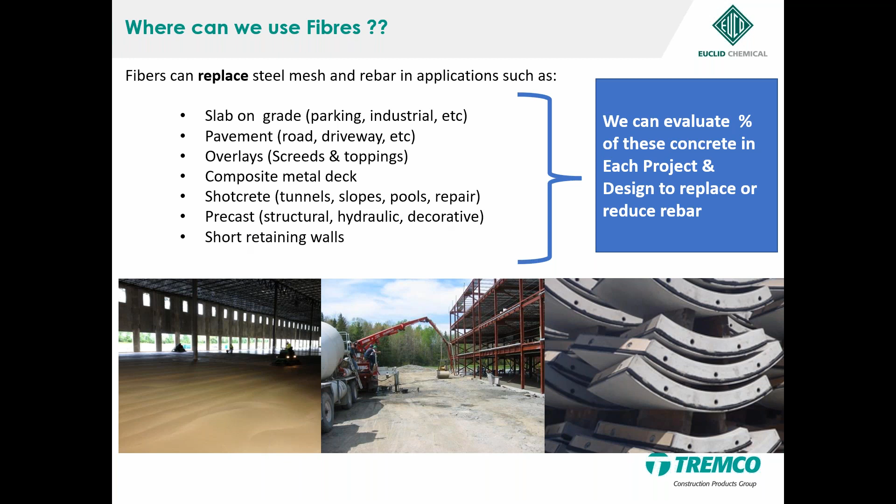These are the places you can easily replace steel with macrofibers: slab on grade, parking, industrial areas, pavements, overlays, screeds and toppings, composite decks which I spoke about at length, shotcreting in tunnels, slopes, pools, and repairs. All these places you can, but everything has to be designed - I'm again and again talking about not just adding a packet of fiber. In these locations you cannot use it clearly because global R&D is still going on; a few projects say they have done it, but I have less information on that. On a suspended slab, a structural slab, columns, beams, cantilevers, you cannot use or replace macrofibers for steel.

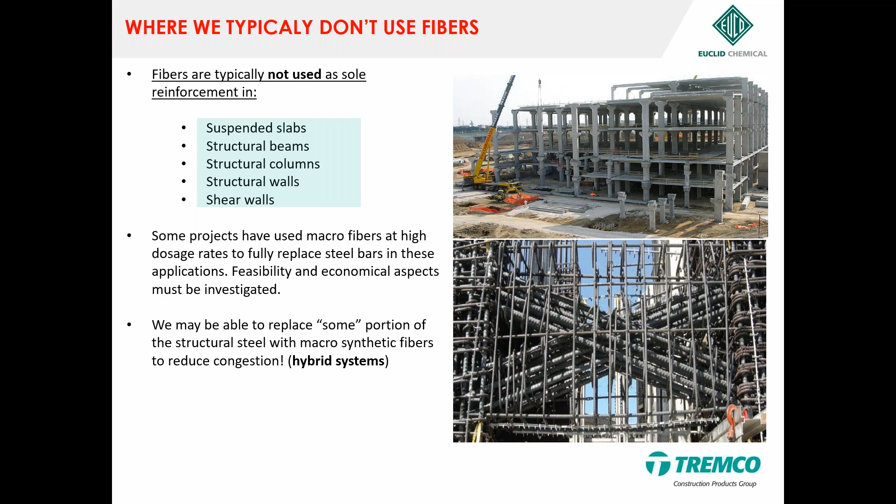Yes, you can replace steel in places where congested reinforcement is there. For steel which is used for plastic shrinkage, drying shrinkage, and temperature control, that can be removed and space made for concrete to come inside with macrofibers, because that will give the properties steel would have given if you had not replaced it. So these are the two places you can use it, and where you should not.

Thank you, sir. Next, we have a question asked by Mr. Nana Mulik: what is the difference between polypropylene fiber and steel fiber in terms of strength?

The strength I've already mentioned - yes, steel would always be ahead in strength in some of the parameters. But more importantly, by comparing strength of two different materials alone, you will not be able to conclude anything. The dosage of steel fiber is anywhere from 12 to 60 kgs, whereas macrofibers, polypropylene fibers, can vary from 1.8 kg to 12 kgs only. So it is 1:4.5 to 5 depending upon the design. Whatever the parameters of concrete properties you want, you can design it either with steel fibers or polypropylene fibers. Most important is please define the properties of concrete and use one of them - there is no problem in that.

Everybody has to submit the report. The most important thing is submission of report for a particular load. Then the rack load, the point load, everything has to be calculated and then allowed to be used.